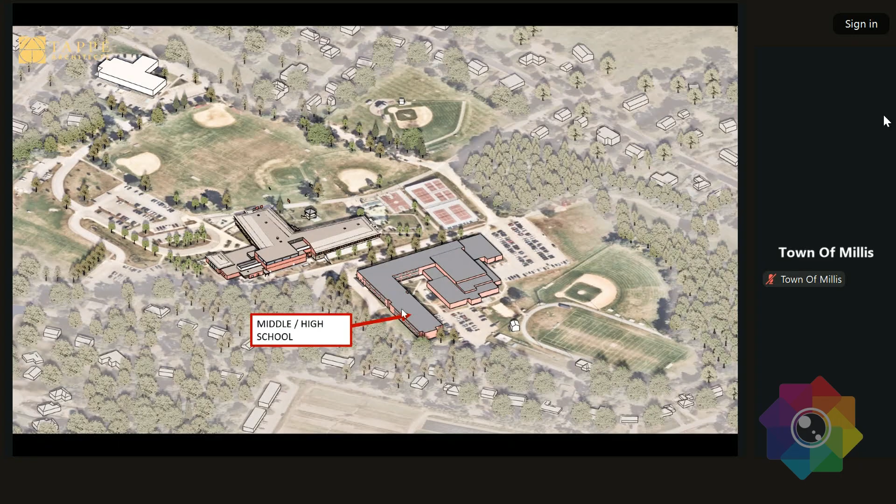On the screen, you can see a rendering of the site as it sits today. The Clyde Brown is right there, above where it says Middle High School. And then the high school is the portion where the note points to. So the project is proposing to take the one end of the wing off - that's the last wing that was built and the one that has the most inefficient space in it for classrooms, as it so turns out.

And then where that green area is, that's where we proposed putting the addition. So that's kind of the lay of the land. When we kind of walk through the plans, you'll see this emerge as the addition and then the existing-to-remain portion. So this is a little over 50% addition, 50% renovation, in addition to that, to the building.

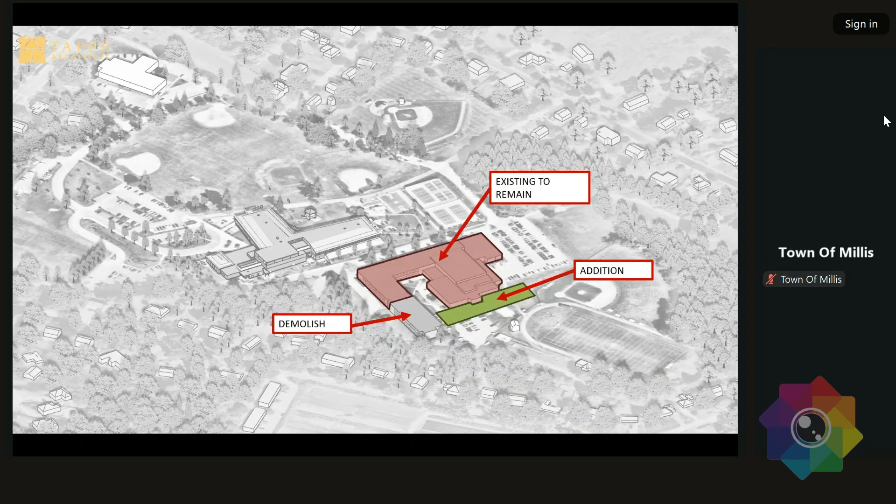And so the next slide shows a site plan that has the new proposed building on it, and the green portion is the addition to the building. The current thinking on that, in the way it's been programmed so far, is that the addition is the middle school, and the high school would be in the existing portions of the building to remain.

These two elements are built around a center core of shared spaces like media centers, arts, athletic spaces, the cafeteria and auditorium, and things like that. If you were designing a middle high school from scratch, that is a common way to go about it: two separate schools linked around a common core in the center, so they can come in and out of that as needed.

This next slide shows the proposed floor plan, and you can start to see how that lays out. The high school is in the top left of this image, the middle school at the very bottom. One of the key benefits of the project is getting a new gym, which would serve the high school well, creating new capacity for sporting events while also right-sizing all the elements that sporting events can happen in.

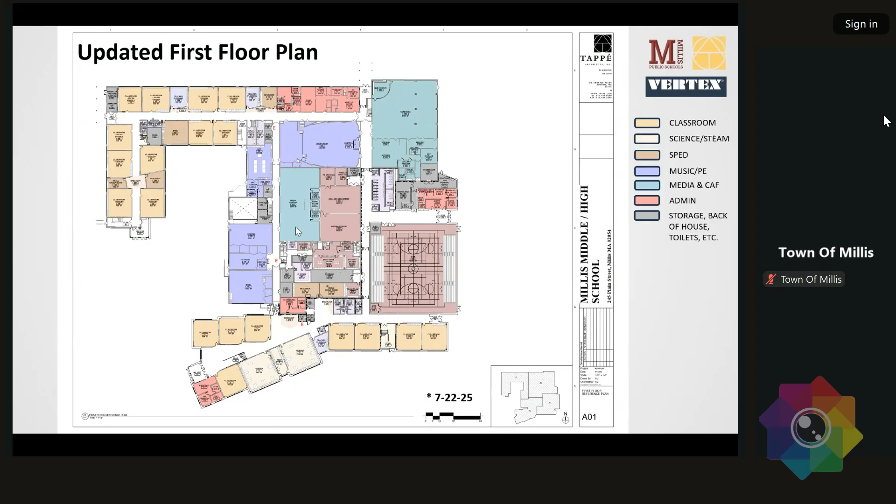Where the gym is currently, we're actually moving the media center into that space and creating some alternative PE programs. So half of it would be a media center and half would be alternative programs.

On the second floor, it's a similar approach where we have the high school top left and the middle school at the bottom. Here you can see where the most renovation work is happening, where the most walls are moving, and that's really because of the science wing up at the top. Those classrooms were one of the key drivers of this project due to the unsafe size of science rooms—they were undersized, and you can't hold as many students in them while still maintaining the science standards and curriculum we teach now in 2025 and beyond.

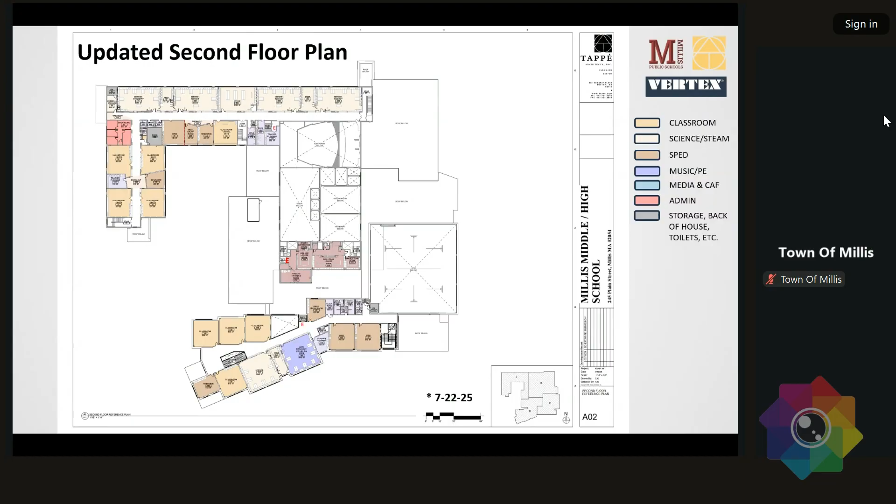One of the key aspects of this project, which came about through the space given, was an analysis and big study concluding that we should reconfigure the high school wing to accommodate right-sized classrooms for science. The next slide is a series of axon drawings.

This is just to help you see the addition in another way, so you can see the third dimension—the extrusion of the two-story classroom wing for the middle school. The existing structure to remain is all white, and the addition is that pink color.

On the bottom, you can see a section through the site where you have the Clyde Brown right across the driveway, perched up high on the hill. As it flows down, you get to the existing school, and even further down is where you run into the addition for the middle school.

The reason this was done is to show how the context of the site matches—we're not proposing putting a 4-story building here in the middle of rural Millis, next to a 1-story elementary school. We're trying to show how the sensitivity of this plan also matches its environment and the campus it's on.

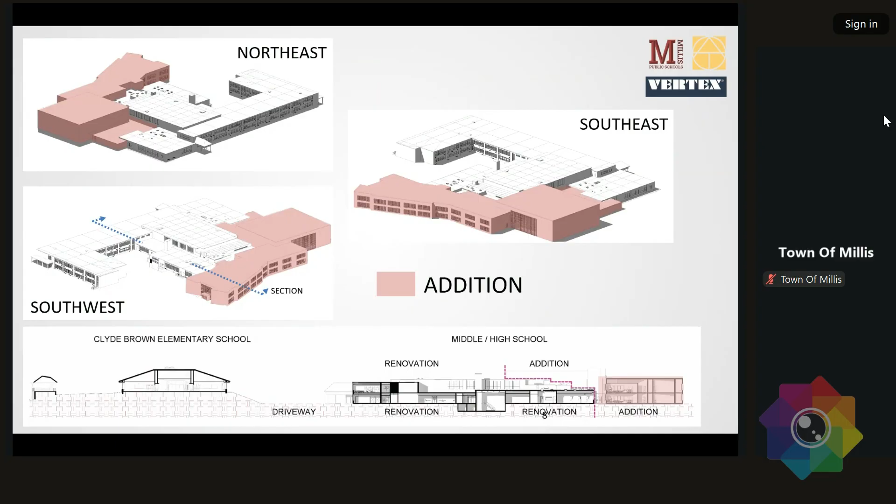More to that, we are looking for a palette that enhances the campus feel, not just from the two schools alone, but from the entire municipal campus—this building and the two school buildings across the park. We're really not looking to do anything super new or extravagant; we just want to make these buildings fit together as a homogeneous piece.

That was one of the things we started with the Clyde Brown, as we tried to bring that forward with a more modern take on some materials like brick patterns, but it's still the same palette of materials, and we propose doing that too on the middle high school. The next couple of slides show a series of drawings that will highlight that a bit.

So the brick is the red color—that's just a utility brick size. Then the upper windows of the gym are this polycarbonate panel. You have them on the Clyde Brown too, and they do a really good job of letting light in but diffusing it, so that at early mornings or sunsets or any time of day, there's no direct glare issue into the gym, but it really lights them up.

Most of the gyms with this much clerestory really don't even need to use the lights during the day. Then we have this stone product—it's actually a split face block unit. It's a little more cost effective, and it helps us break up the entire palette a bit on the gym.

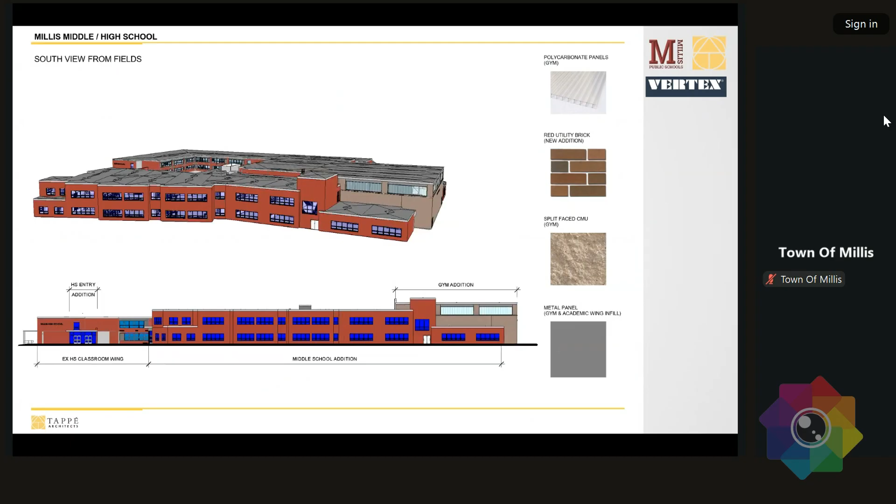The next slide rotates down, looking from the south northward. It's like if you're in the football field with a drone hovering over it, or on the bottom picture, it's an elevation, so you're actually standing in the field.

You can see here that we're bringing what's already here into this addition, and we'll do some brickwork details at the end where we might pull some bricks out to create shadow lines. That's not really much extra cost at all, it's just detailing to make the wall look nice.

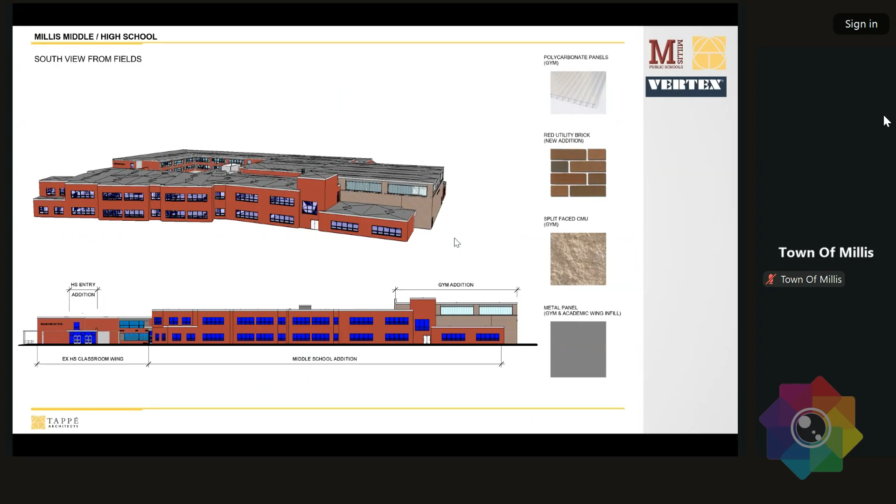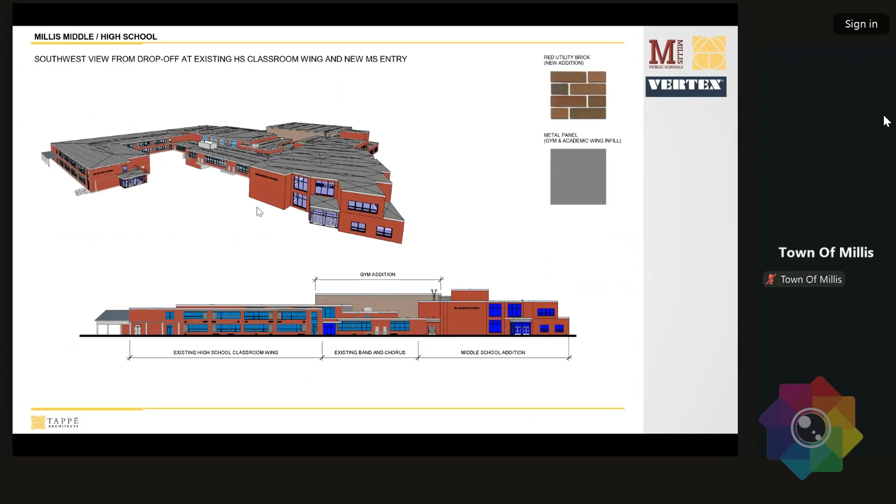There used to be a building here on the end, and in the site plan you'll see some of the site circulation. This would be a new drop-off area for cars, helping bring traffic around to the back side of the building, which becomes one of the front faces for drop-off and pickup of the school community. There'll still be community entrance around the front.

This image is from the road between Clyde Brown and the high school. The bottom set of images shows different ways to look at architecture, but this one was us looking at the reconfiguration of science wings, creating moments where we had walls that landed in windows to get the right size spaces.

We also have an issue fighting the climate and all the energy efficiencies we need to hit. The window ratio here was really high, so you have a lot of glass, just ribbon windows all over the place. One thing we were trying to do was help your future energy bills, but also help the plan shake out like we needed it to.

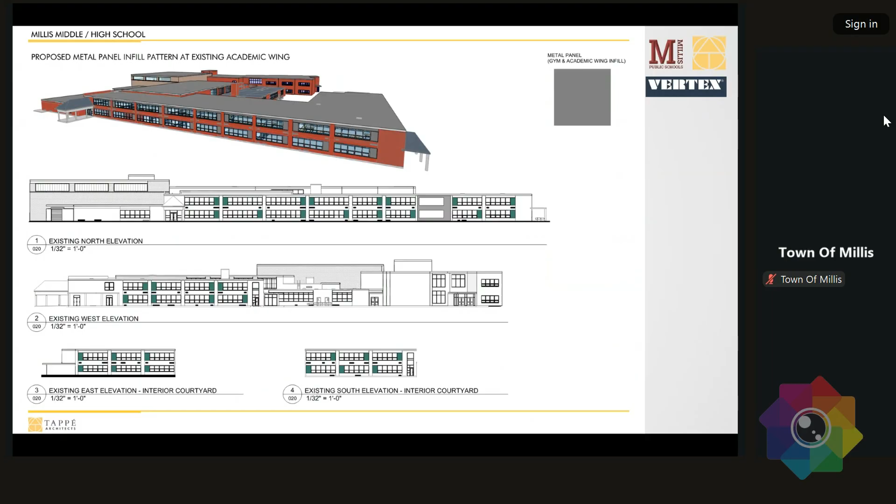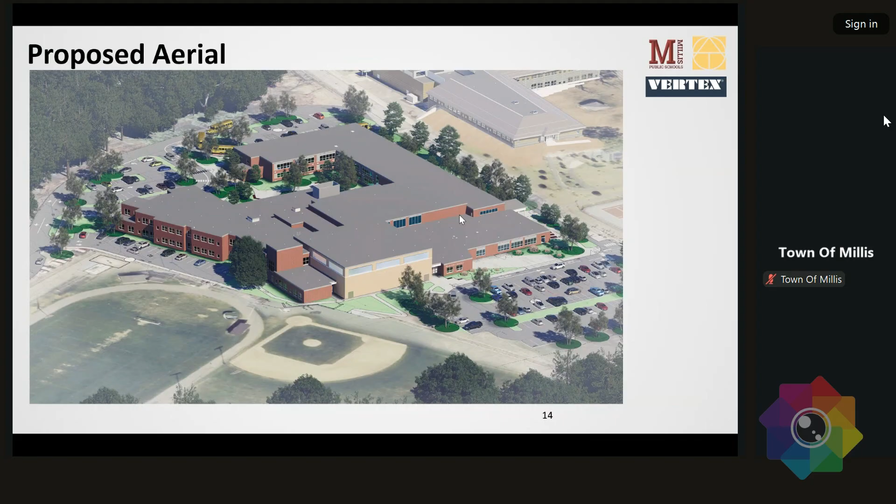On the top left corner, you can see the parking and drive aisle that comes along the edge around the middle school, and how the building comes along. This site plan shows that too: we have a site plan that allows for buses there, and then the cars would come around where the blue circle is, or blue arrows, and drop off there.

That's what I have, and I'll turn it over to Jeff to talk about schedule and budget.

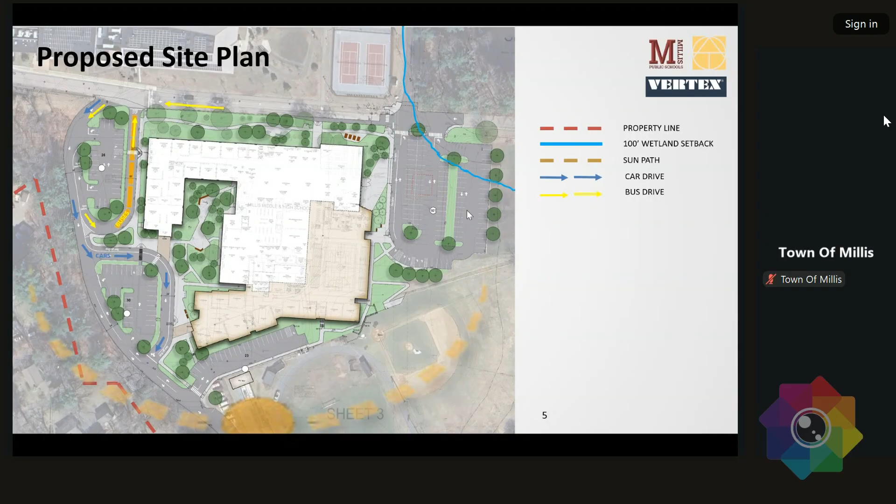For schedule, right now we're wrapping up the schematic design this week and submitting it to the state, where they'll go in front of their board for a vote on the overall project. It'll come back in front of the voters this fall. With a successful vote, there's about a year of design and permitting to complete before this project. We'd be bidding it about a year from this fall, then starting construction in early spring of 2027, as soon as the ground thaws and we can get moving in March of 2027. We envision about 28 months overall of construction, with multiple phases within that portion.

I wasn't going to go through all of them tonight because I know a lot of you have seen them, but I do have them available should you want that level of detail. Essentially, you move into the middle school, then vacate the back portion of the high school, renovate that, and keep that one wing that will be demolished all the way till the end of construction, then demolish it on our way out the door. I can show those slides tonight if you want the play-by-play.

But ultimately, the project wraps up in summer of 2029, so about 2.5 years overall of construction on the campus.

The overall budget - the committee's met many times over the course of this year to talk about numbers. We've met in front of both of your committees in February when you were narrowing options down, when you looked at that value proposition of the various levels of addition and renovation only, and new construction. The option selected was the one we presented tonight. Right now, the school building committee has established a not-to-exceed budget of $125 million.